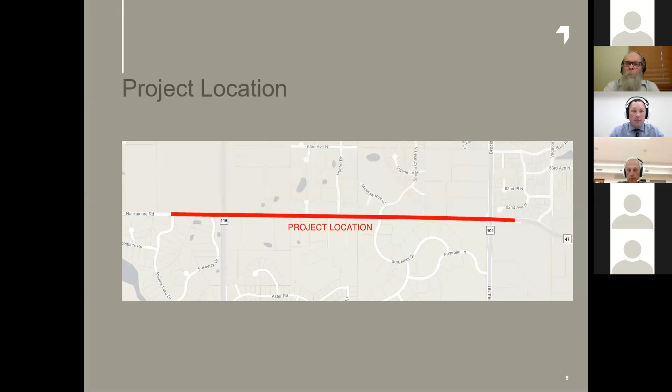So I'll start off with some project information here. As Kevin also alluded, the project location starts at Medina Lake Drive to the west, across 116 to the east, and then over to 101, with the westbound approach to 101 essentially being the project corridor that we're asked to look at.

Next slide. So a few background things. This is a joint project with both the cities of Corcoran and Medina. The idea here was to develop a cohesive plan through this corridor to help guide the cities for a lot of their planning efforts. Of course, we want to address some of the deteriorating pavement and other infrastructure visible in the corridor, whether that's pavements, drainage, culverts and other things, including the intersections that abut the roadway here.

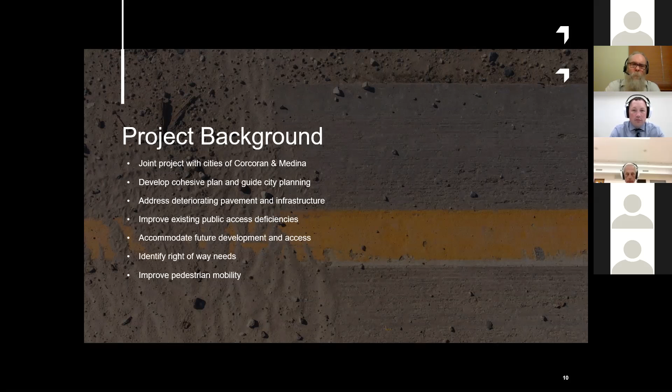We're also looking at improving some of the existing access points, like those intersections or other streets that connect with Hackamore Road. We also want to look at how we can accommodate future development. There are a number of developments here that have not quite proceeded or are not complete. On the south side in Medina, we've got the reserve near Hackamore Circle. And on the north side, Corcoran, you have a number of developments, especially around 116, that have not really proceeded into construction. So we're looking at ways to accommodate those access points. And with the design, we also want to identify what there may be for right-of-way needs, to help plan some efforts here as things move forward. And of course, we also want to look at improving the pedestrian mobility throughout the corridor as well.

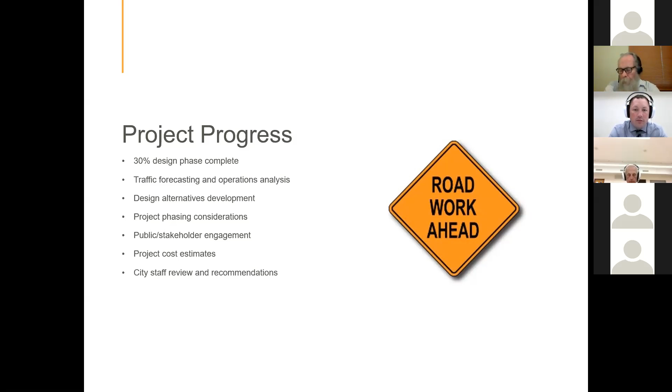So to date, with the project progress, this is essentially the end of the 30% design phase. With this design, we've done a number of things, including traffic forecasting and operations analysis. We looked at a number of different design alternatives that really came down to 2, which we'll discuss in more detail. We also looked at project phasing considerations for construction, largely driven by needs initially on the east half and then development potentially on the westerly half. We did public stakeholder engagement and coordination with other agencies involved. We also looked at a fairly detailed cost estimate for both options, which we'll review shortly. And then we talked to city staff and came up with some recommendations for the city council to consider.

I just wanted to show a few pictures of the existing conditions here. Didn't want to inundate you with a bunch of pictures, but this will give you an idea of what we're looking at, for those who may not know. The first picture on the left is looking west towards County Road 116. You can see the pavement failures there, and if you look further, there isn't really much for intersection controls on the Hackamore side.

The middle picture is looking west again. On the right-hand side you'll see the Ravinia development, which has been underway for a number of years. The right-hand picture is looking east towards County Road 101 — a little different scenario here, with a bit of an urban section as opposed to the rural character in the other two pictures. You can see existing bituminous curb and other more urban attributes there.

One thing to note in these pictures are the existing power poles and some of the utilities you can see, utility boxes and so forth. It's certainly something we're looking at through this design, and we'll refine that further as we get along in the project. But it's certainly going to be an impact with the proposed improvements.

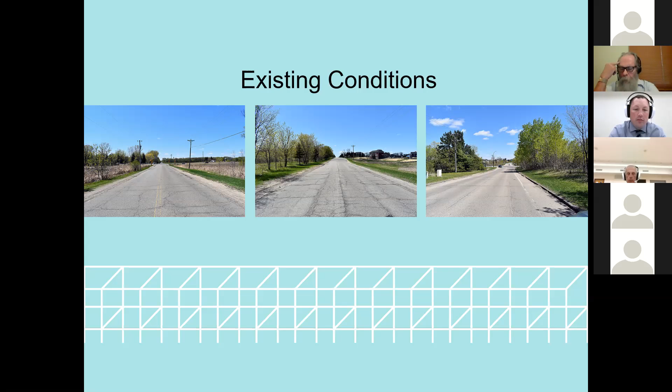One of the more detailed items we performed with this portion of the project is the traffic operations analysis. We did some traffic projections and actually did traffic counts in the field this spring, before the pandemic hit — we caught it just a couple weeks before that, so we were able to capture generally full traffic before things quieted down for those months. We came up with a number of AM peak hour volumes and did an analysis of the turning movements throughout the corridor. On the right-hand side you'll see an image of one example of what that turning movement analysis looks like at the intersection.

In the full report, you probably noticed there are a number of these for some of the critical intersections throughout the corridor, and that helps guide some of the evaluation and recommendations as far as how to deal with those intersections — whether we're adding turn lanes, in one direction or both, rights, lefts, and that kind of thing. Later on we'll look at a comparison between options 1 and 2.

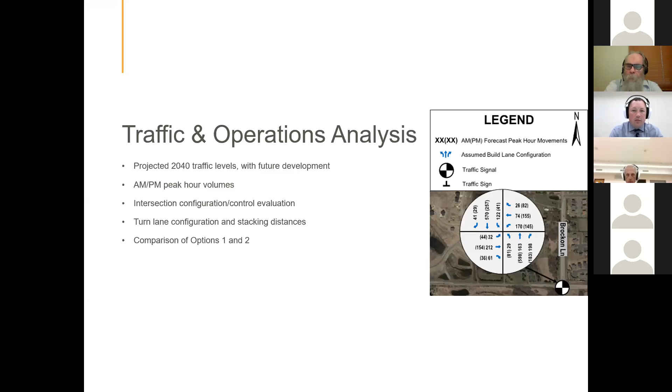So the proposed improvements are outlined here. Generally, the road will be widened through most of the corridor. Early on, the city worked on an evaluation of where a trail could go, and based on some of the wetland impacts, potential right-of-way impacts, and the potential for flexibility with future development on the Corcoran side, staff thought the trail would best fit on the north side somehow.

In both options, the trail is situated in a couple different ways — I'll get to that in a second here. The initial option has a center turn lane, so it's 3 lanes eastbound and westbound, with a center left turn lane through the whole corridor.

The second option has both east and west through lanes, but more dedicated turn lanes, where we really tried to minimize the width and impacts to road widening. We used that turn lane analysis to hone in on just the intersections where turn lanes were absolutely necessary.

In general, we're proposing to construct this with a rural section, although depending on which trail options are selected, there may need to be some curb to minimize impacts to slopes, properties, and wetlands. At the intersections with County Roads 116 and 101, there would likely be curb, especially on the west side with County Road 116 where there are wetlands, and to better accommodate pedestrian crossings with curb ramps.

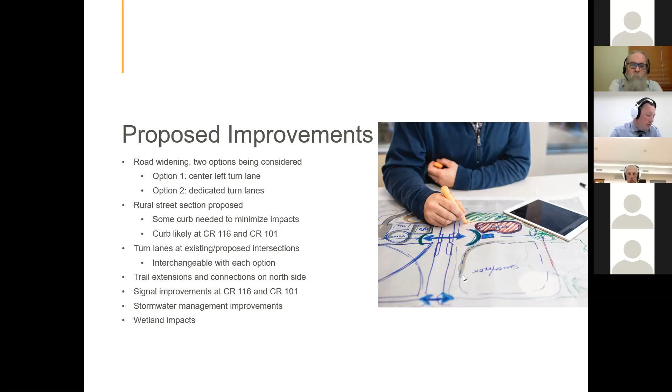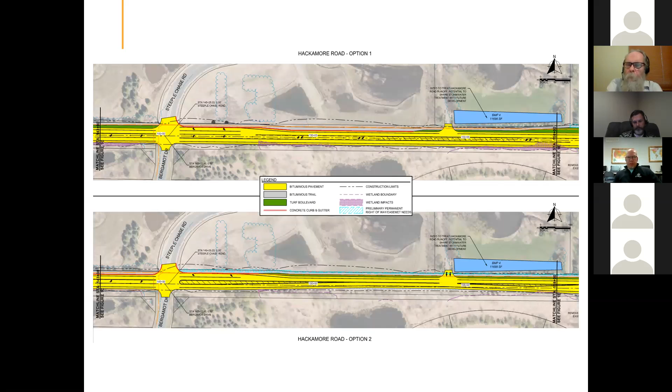So if Eagle Brook Church is going to be right here, these traffic numbers, especially for narrowing the roadway in this section, are somewhat concerning to me. If you've got such a large church exiting some 800, 900 vehicles every Sunday, quite a few of them are going to be going to the west, I would think. And then immediately they're going to face a restricted roadway, correct?

So thank you, council member. We actually were able to incorporate and use some projected traffic data for the church with the number of parking spaces they were proposing. What they are proposing is 2 access points on Hackamore, one dedicated exit and one dedicated entrance. In this picture, you'll see on the bottom there's those 2 arrows pointing towards Hackamore. So this would be their dedicated exit.

And so they wouldn't need additional turn lanes, like left-hand turn lanes that you would see up on the upper exhibit there. Beyond that, the through lanes shown here in both examples would really accommodate that traffic just fine. I don't know if they would see any restriction as far as their ability to move in and out of that site. Now, if you want to go to the next slide down, this one shows the entrance.

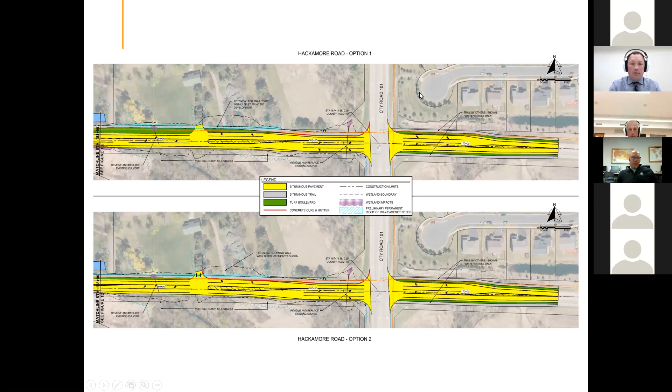With this project, we are proposing to phase it potentially — the yellow on the right-hand side is kind of that easterly half. That half, with the exception of the church property there, is pretty much fully developed. The timing of that property coming in for development review is actually timely, because the city was able to work with them and figure out opportunities to utilize their property and share in some of those costs. Now on the western pieces, we've got two phases shown — maybe it ends up being one phase or whatever, but this will be more development driven.

When we talk about that, it gives us a little time to figure out if maybe this westerly piece might be better with the 3-lane option, because you could go with the 3-lane for the western half, and if you wanted to go with the 2-lane option 2 on the easterly half, that's an option too. So in subsequent years, there'll be flexibility to look at what's been developed and when, and incorporate that into the plan. Initially, the east half could be constructed as early as 2021, and we're guessing the westerly phases maybe as early as 2022, but it could be a number of years after that depending on how development proceeds.

Okay, yeah, that's helpful. Thanks, Jim. I'll shut up now and let other council members weigh in.

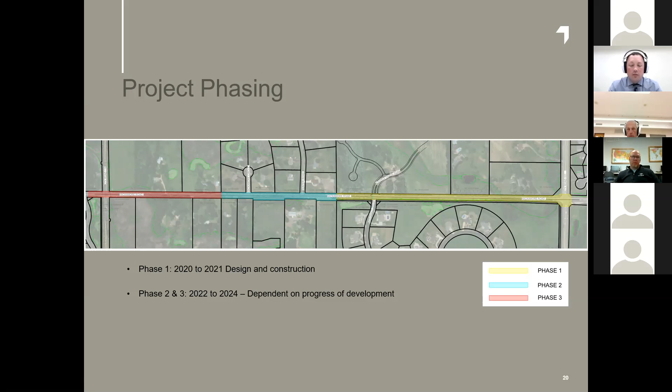We'll talk a little bit about the coordination efforts we went through with the project. Initially, when we put this together, we thought we'd be in a room together for these neighborhood meetings, seeing people face to face. But that changed fairly quickly, so we modified our approach.

We ended up doing two activities. We did a social pinpoint online mapping activity, where we overlaid both options on top of each other so you could toggle between them and see what the existing area looked like with the aerial imagery, and how each option might change the vision of the corridor. Folks were able to put comments right on the website, some were responded to, and there were thumbs up and thumbs down and different ways to engage and put their thoughts down.

We also did a virtual open house, much like this presentation, followed by a question and answer period. Some folks talked specifically about drainage issues that we are looking into and will look into further as we get deeper into this project. Those are mainly on phases 2 and 3, potential future phases we might construct at a later date.

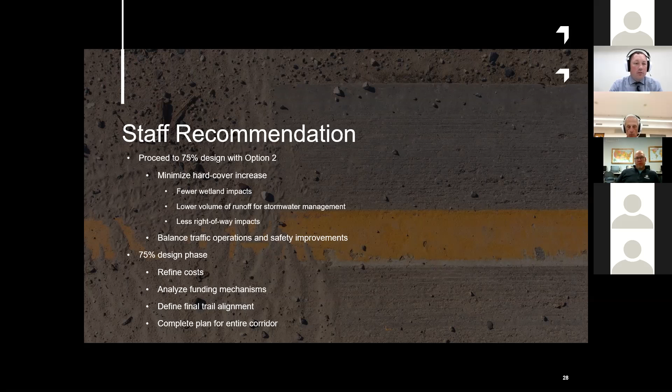Just a rough schedule here: tonight we're looking at this with you folks, and next week I'll be presenting this to the City of Medina Council, for the council to consider selecting one of these preferred options and move into 75% design. We'd finish that design in the next couple of months, and then bring it back to council to go through some of the changes or additional things we discover or are able to resolve. Looking further ahead, if council decides to proceed with phase 1, finalizing construction plans and potential construction in 2021.

So with that, I'll leave it up for any remaining questions or comments you might have, and even things you might want me to bring to the next council meeting with Medina, as you see fit. Thank you for having me.

Mr. Mayor, just want to jump in. I got a text from Councilmember Bottom. He had to drop off. He said everything's okay, but it sounds like he's off for the remainder of the meeting. I just wanted to share that. Oh, okay.

Any questions, comments, discussion? Yeah, I'll go first if nobody else wants to. Being a resident that lives on Hackamore Road and I drive Hackamore every day, I have a sense of what's going on with the road.

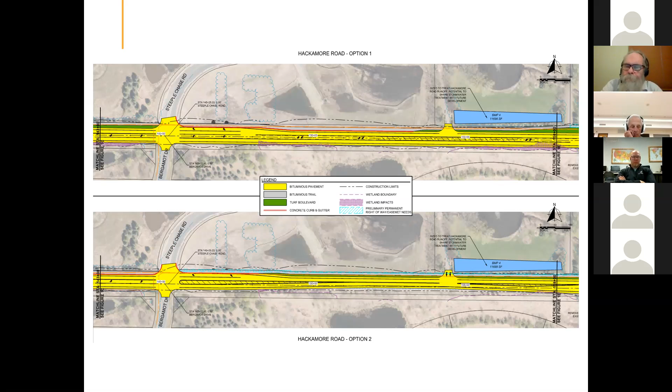Sure, so like Kevin alluded to, why don't we click up a couple slides and we'll look at the other area. One more - yeah, down one.

Okay, so on the east part of this, with options 1 above and 2 below, you'll start to see that we're transitioning to a narrow roadway there. In this area, as we transition to the east, we are getting into some of those single family residential homes.

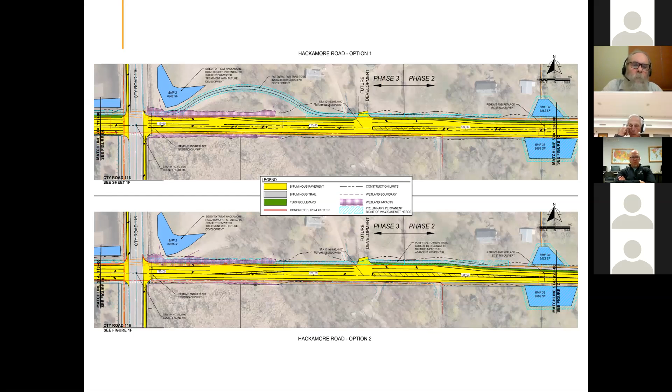Why don't you click down one slide. On the left-hand side, you can see that we're really avoiding some of those impacts to a greater extent. There were concerns about a number of nice trees there, shown as those black circles, and what kind of impacts we'd see there. So there might be ways to better alleviate some of those impacts with a narrower roadway section, especially in this corridor where we have more of the single family homes.

This is Alan, I agree with you. In phase 2 and phase 3, there's not much difference between options 1 and 2 with significant impact. But in phase 1, I understand there won't be any turn lanes, and having that center portion just sitting there - what it does, from what I've seen, is it'll divide the traffic and create further separation from cars coming down the road. So if you have somebody on the side of the road and you have to swerve, you don't have to be fearful of swerving into oncoming traffic - you can swerve into that lane. I see that a lot. That road is used by bikers, and right now there's walkers too because there's no place to walk, but we constantly get large groups of bikers on that road in the summertime. So to me, if you could do phase one with option 1 and the rest in option 2, I'd be totally fine with that.

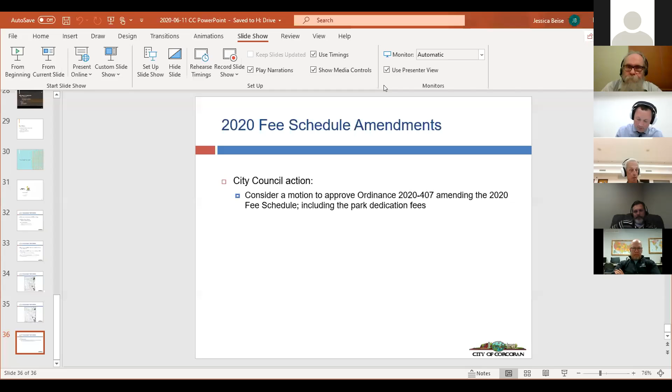Okay, item 11A, which is a pandemic response update.

Thank you, Mayor and Council. The most recent update from the state is that we're just probably over about 29,000 cases now in Minnesota. So far as a city, our expenses are holding steady. We're now into the new phase as we anticipated, managing staff exposures, and officers have been exposed to COVID in the community. So we're working on what that looks like as far as monitoring, testing, and potential quarantine if necessary. But also helping the community, as you know, we've had businesses and also a church reach out just to discuss what opening plans look like and to seek advice, and we're trying to be supportive in whatever way we can to help the community as they're seeking out answers to questions.

We've also been working internally on really developing what our next phases look like as we look at potentials for loosening restrictions on public hours for City Hall and other community impacts that the pandemic's having. So I can turn it over to Brad to fill in any blanks that he might have and then take any questions that you might have.

Thanks, Matt. Yeah, phase 3 obviously began this week. So as Matt said, we've been working with different property owners. Actually, I was with Christy at the Stanchion a couple hours before the meeting tonight, and I did send a letter allowing her to essentially have some temporary expanded outdoor space if she meets some conditions. So she's planning on opening the Stanchion tomorrow, for example. So those are the types of conversations we're having with that.